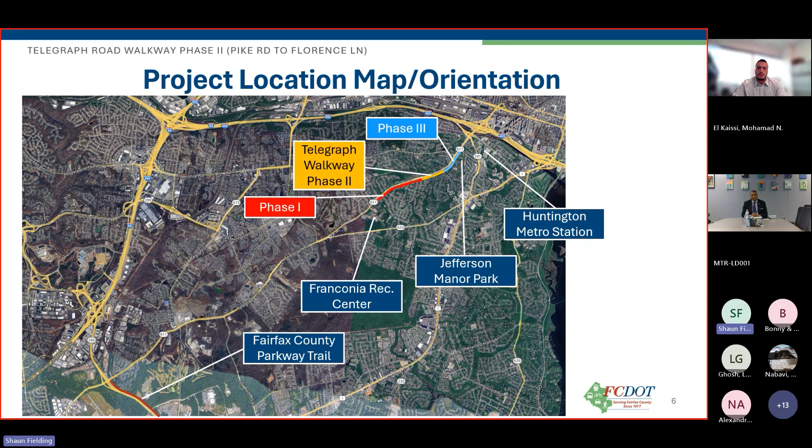Phases 1 and 3 of the project are already complete, labeled in red and light blue. We want to point out how important this connection can be to various amenities of this area, including Huntington Metro Station, Jefferson Manor Park, the Franconia Rec Center, and even long-term connections to the Fairfax County Parkway Trail.

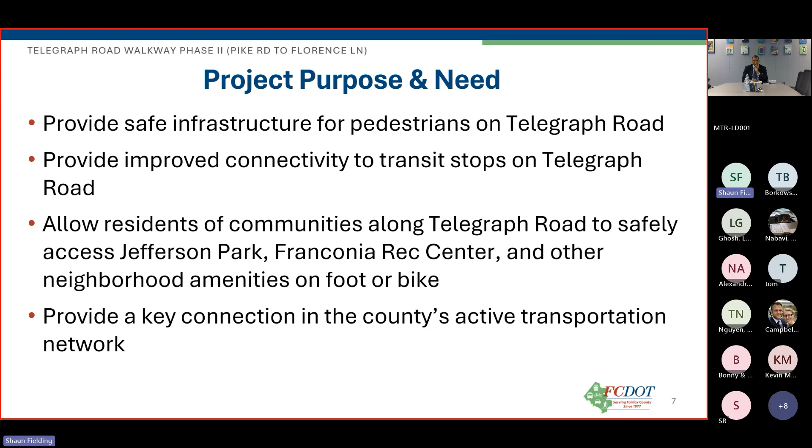The project's purpose is to provide safe infrastructure for pedestrians on Telegraph Road, to improve connectivity to transit stops along Telegraph Road, to allow residents of the communities along Telegraph Road to safely access those amenities mentioned a minute ago, and to provide a key connection to the county's active transportation network.

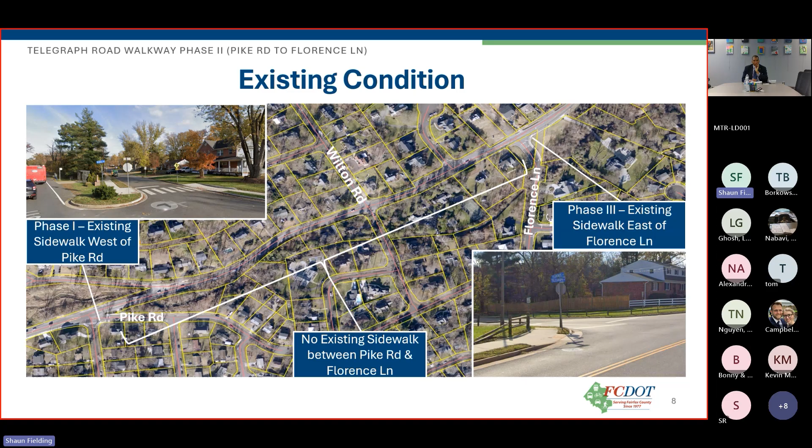Today, there is no sidewalk present between Pike Road and Florence Lane. The Phase 1 project extends from Pike Road to the south or west, and Phase 3 extends from Florence Lane to the north or east. Again, there is no sidewalk present between these two intersections today.

Telegraph Road today is a 2-lane roadway. It's classified as an urban minor arterial. It has an average daily traffic of about 18,000 vehicles each day. It is primarily residential land use surrounding the project footprint.

There are 2 bus stops within this section of sidewalk that we are referencing today. There is today intermittent curb and gutter on both the north and south sides, and intermittent sidewalk primarily on the north, and upstream and downstream of the project on the south.

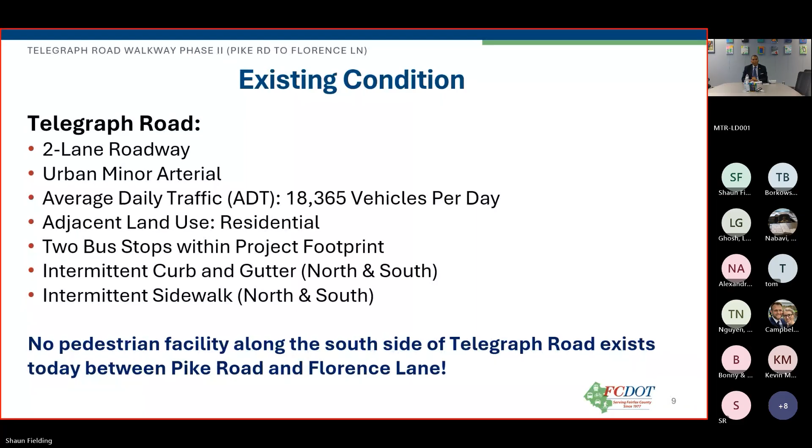I'm going to run through a series of photographs of the roadside, courtesy of Google Street View, which means they are a little dated. They were taken about a year ago by that service. You will see effectively what the existing condition is of the roadway. But please note there is active work going on around Pike Branch, the waterway, where some trees on the side of the road are being removed and some work is actively being prosecuted today. So some of these images are somewhat out of date.

You can see here that we are looking towards the east. We will be looking at images running from the west to the east, towards the Beltway or towards the metro station. North is to the left side of your screen.

You can see on the left side of your screen, or the north side of the roadway - it might be a little hard to see in the upper left-hand quadrant - an existing asphalt pathway that runs along Telegraph Road through this segment. However, note that asphalt walkway is not ADA compliant today. There are several areas of relatively steep slopes, especially at several existing driveways.

You can see the existing condition of the road here on the south end of our project. Subsequent images will slowly move us towards the east, again just to orient us as to the condition of the roadway and the roadside conditions on each side.

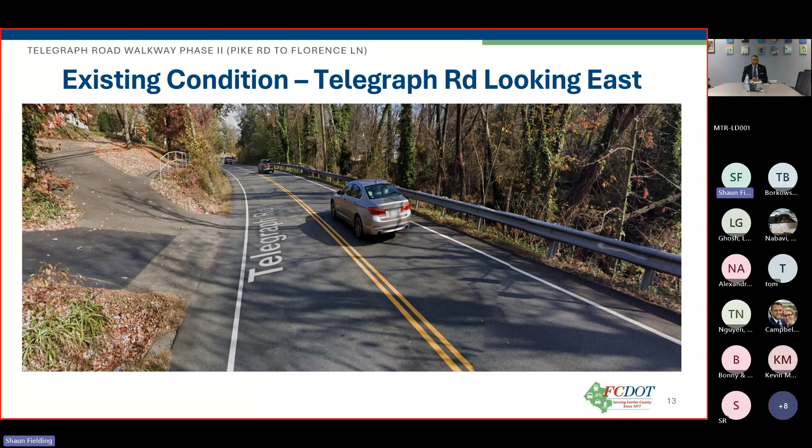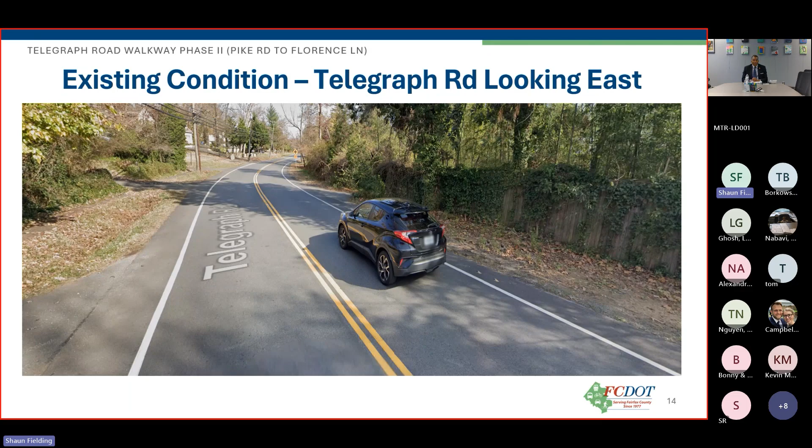That path is still present on the left side, though it is somewhat obscured by the vegetation and the fallen leaves here. But the guardrail is now gone. You can see the private fences on the south side. Similarly here, with fences on the south, no curb and gutter, no guardrail as we move towards the northern end or eastern end of the project.

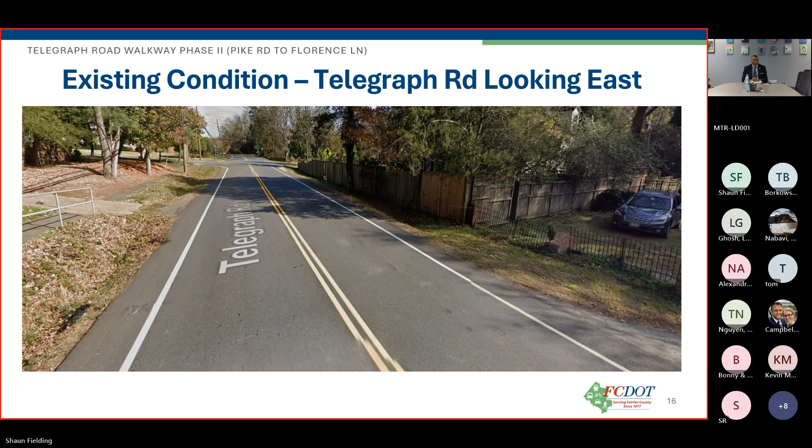Here we're approaching Wilton Road, which is an intermediate intersection roughly midway through our project footprint. We will have new sidewalk and a high visibility crosswalk, and I will cover some of those details in a moment on the proposed condition.

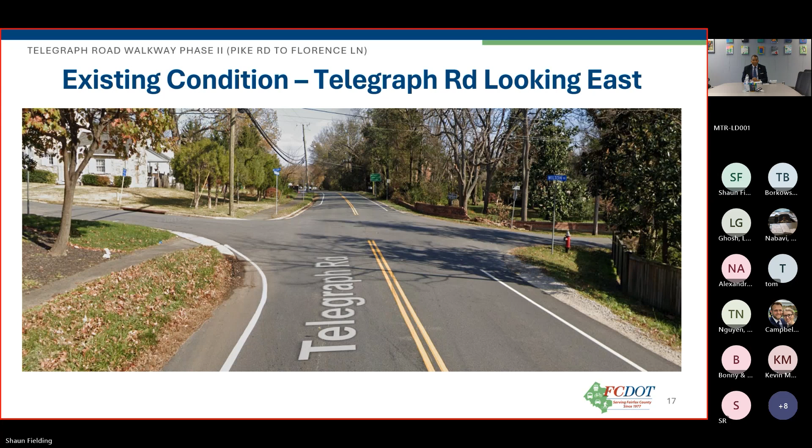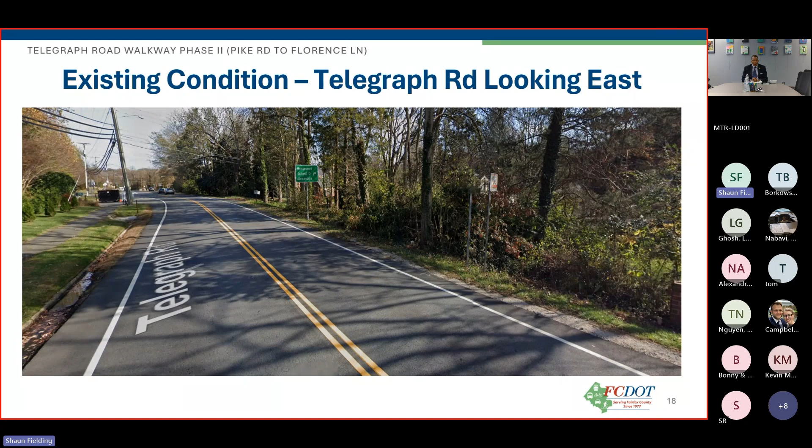Most of our work is happening on the south side, or the right side of your screen, as we are looking east. Towards the eastern end of the project, curb and gutter is present on both sides of the road, and we will be adding sidewalk behind the existing curb and gutter. You can see that asphalt path still present on the left side and some residential properties on the right, and this is effectively the terminus of our project at Florence Lane.

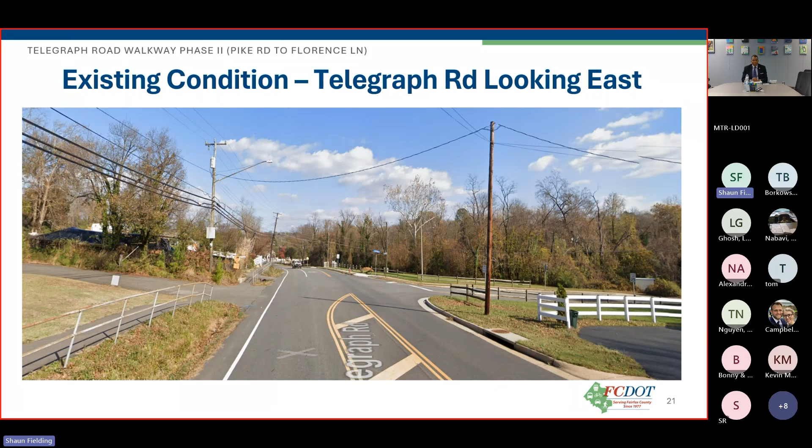That asphalt sidewalk or asphalt path is still present, and this will be the terminus with a new crosswalk crossing Florence Lane.

The project improvements are to provide an additional 1,400 linear feet, measured along the length of the roadway, of 5-foot wide sidewalk with a 4-foot wide grass buffer strip between the roadway and the sidewalk. In addition, there is 495 linear feet of 6-foot wide sidewalk, about half of which will be abutted to the curb, meaning with no grass buffer strip.

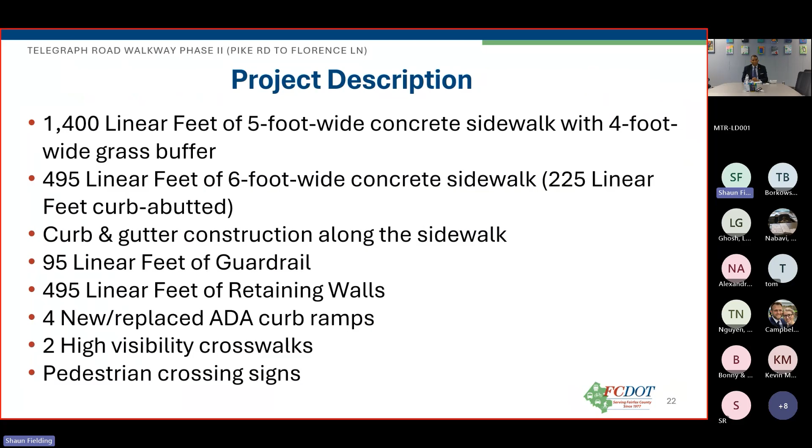This is primarily due to a desire to avoid additional impacts to the waterway adjacent to the south side of the roadway. We will construct curb and gutter along the sidewalk, and provide an additional 100 feet of guardrail where protection is necessary. About 500 feet of retaining wall will be used, again to protect the adjacent waterway. The sidewalk construction will require 4 additional ADA compliant curb ramps at 2 new high visibility crosswalks, along with accompanying pedestrian crossing signs.

Additionally, we will mill and overlay, or repave, the south or eastbound lane of Telegraph Road, adjacent to our work on the south side. We will provide drainage improvements as necessary with the new curb and gutter.

There is an existing double cell culvert, meaning two chambers of structure, that allows Pike Branch to run from the north to the south side of Telegraph Road towards the western end of our project. That culvert will be repaired and a new headwall will be constructed to permit our project. We will remove and reset an existing bus shelter located near Pike Road on the western end of our job, along with other incidental associated improvements such as seeding and restoration of grass, utility relocations, etc.

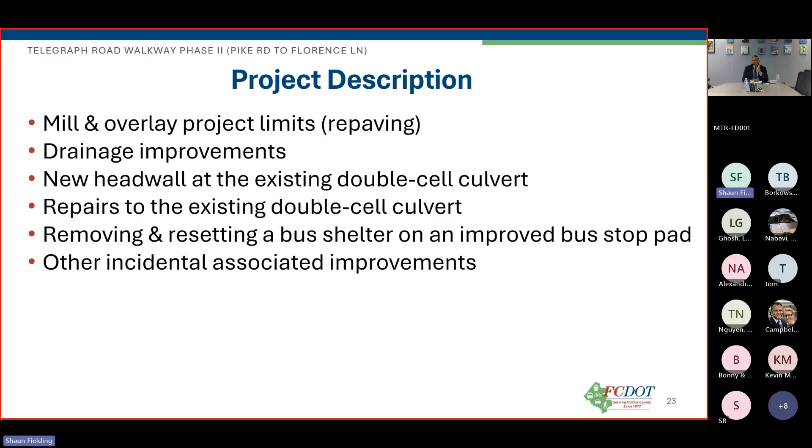I will cover some of these going forward. Again, our proposed condition in visual format between Pike Road and Florence Lane, constructing those improvements as laid out: sidewalk with buffer strip where possible, high visibility crosswalks at each crossing, and about 500 linear feet of retaining wall along Pike Branch to protect that waterway.

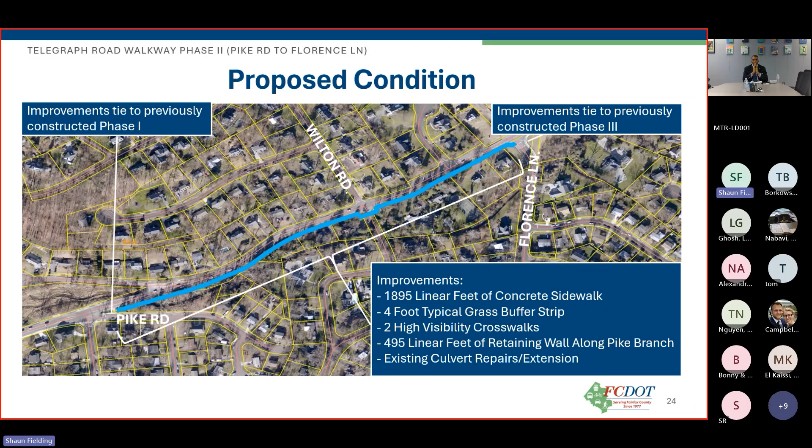We'll be moving into some more detailed views, zoomed in to see more of what our project will entail. Here we are at the western end of the project at Pike Road. The 5-foot concrete sidewalk with buffer strip is present at the very western end of the project, and then there are sections where we abut the sidewalk to the curb and gutter in order to reduce our impact to that waterway, which is Pike Branch.

The retaining wall here is also there to protect the waterway and avoid environmental impacts. Here, the culvert extension can be seen, as labeled, with the leader pointing to the location of that passageway for Pike Branch to run underneath Telegraph Road.

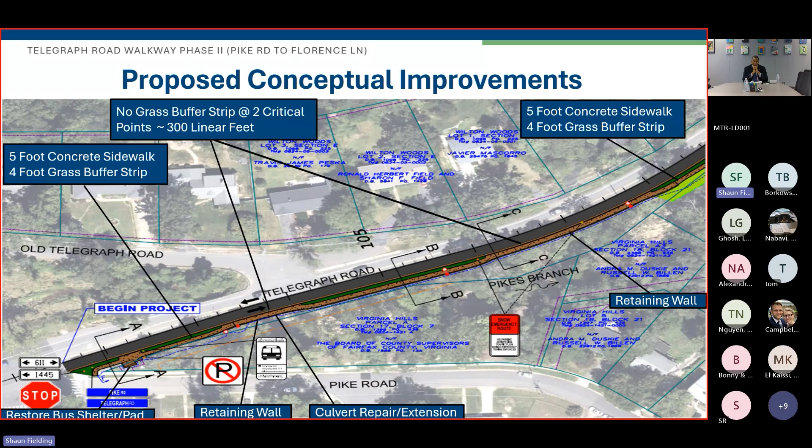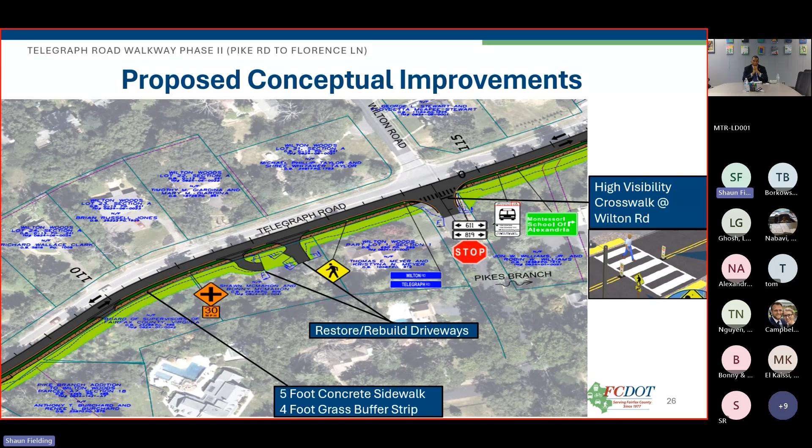As we move towards the east, our work will provide continuous sidewalk with buffer strip from that point on. We will rebuild and restore any impacted driveways to the adjacent residential properties, and provide a new high visibility crosswalk across Wilton Road. You can see in the image on the right what a high visibility crosswalk is - that pattern of transverse stripes across the road.

This is the terminus of our project at Florence Lane. Again, continuous sidewalk and buffer strip will be provided, rebuilding and restoring impacted driveways to the residential properties, and a new high visibility crosswalk across Florence Lane.

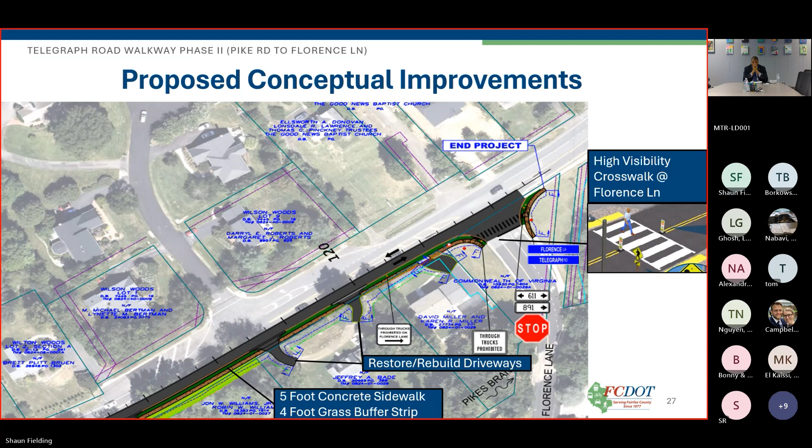Grading will be as tight as possible, and in areas where the grading goes beyond the existing right-of-way, we will propose temporary grading and construction easements, highlighted here as that green dashed line and labeled as such. Those temporary construction easements will expire at the termination of the construction project, so they are temporary impacts. Any disturbed area within that will be restored with topsoil and grass seed.

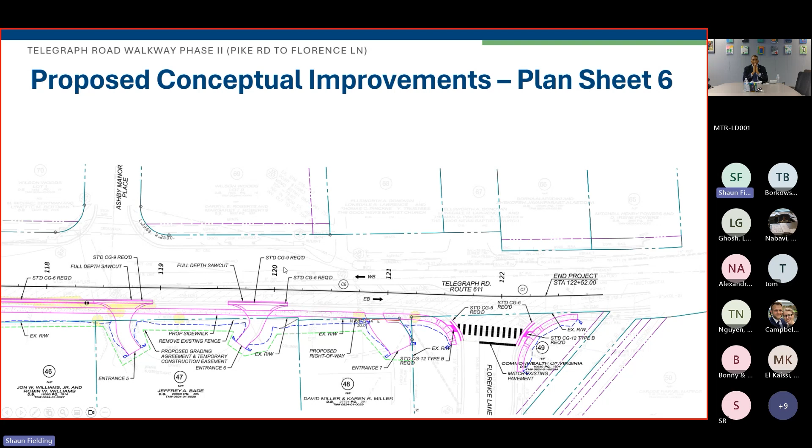This is kind of a zoomed in view of that parcel 48 so that we can see the one right-of-way impact that we have. It's that blue shaded area. It equates to right around 46 square feet. It is a relatively narrow strip and creates a property line that is parallel to the roadway center line.

There are 6 total residential parcels that are impacted. Only this one with right-of-way. The other 5 parcels, as I've mentioned, will have temporary construction easements with a grading agreement.

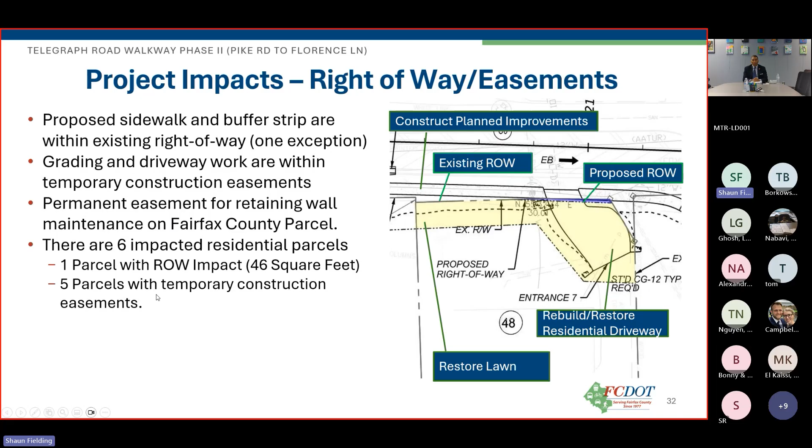This is each parcel laid out. Again, just to highlight that we have a relatively minimal impact as far as right-of-way goes, just that 46 square feet for parcel 48. Easements: the only permanent easement we are proposing is applying to the Fairfax County Board of Supervisors property towards the western end of our project. All other easements are temporary for construction.

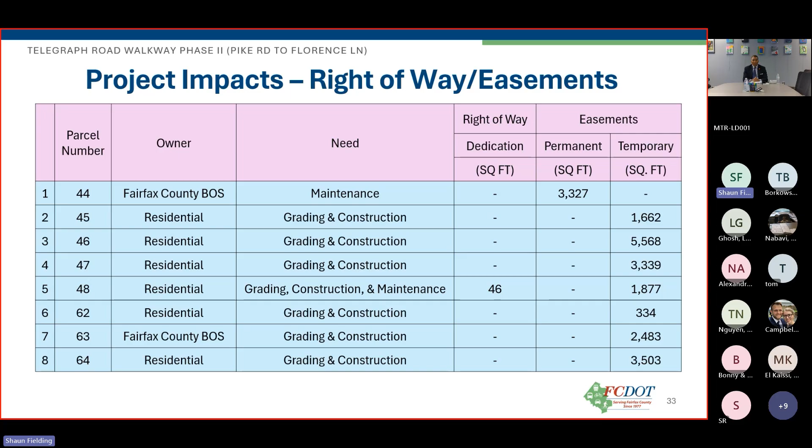Our proposed condition in cross-section view will look something like the image on your screen. We are building curb and gutter, a utility strip or grass buffer strip—those are equivalent terms—with a 5-foot sidewalk throughout the majority of the project. Where there is a need for a retaining wall, we will have a 6-foot sidewalk with the retaining wall to allow for better bike usage, to have a little bit of extra space for bicycles.

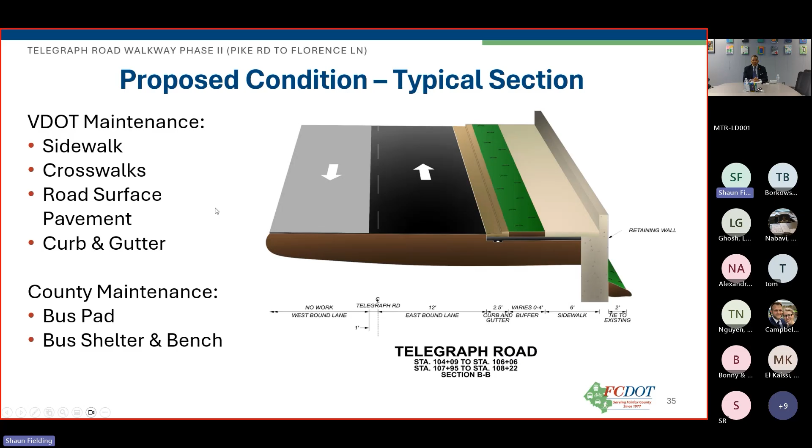And the buffer strip in these areas will vary between 4 feet and 0 feet, where the sidewalk abuts the curb and gutter in some areas. Where it abuts, it will look something like that, where the width of the sidewalk begins to vary, but it will attach directly to the curb and gutter.

All of the roadway improvements will be eventually maintained by VDOT. The only county maintenance items will be the bus pad itself, and the bus shelter and bench associated with that bus pad. All the other elements will be transferred to VDOT for state maintenance.

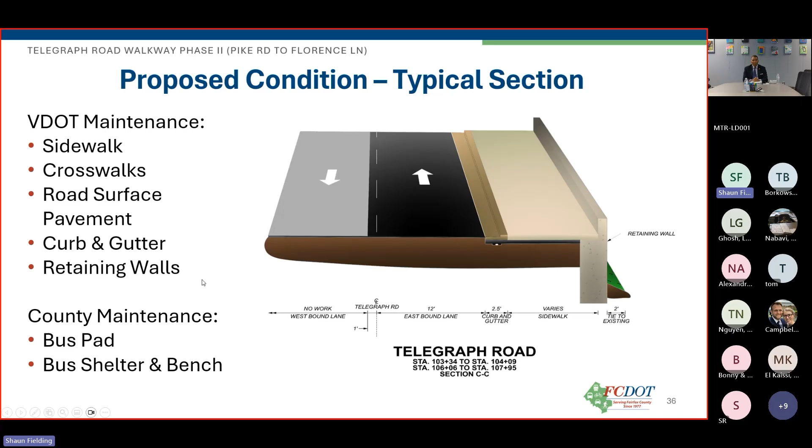The bus stop, as it is today, is shown on your screen. This will be improved as curb and gutter will be run along it, and it'll need to be raised to meet that grade. So we will replace it with an upgraded 25 by 9-foot concrete pad. The bus shelter will be relocated to that new pad, and the bench will be relocated if necessary as well.

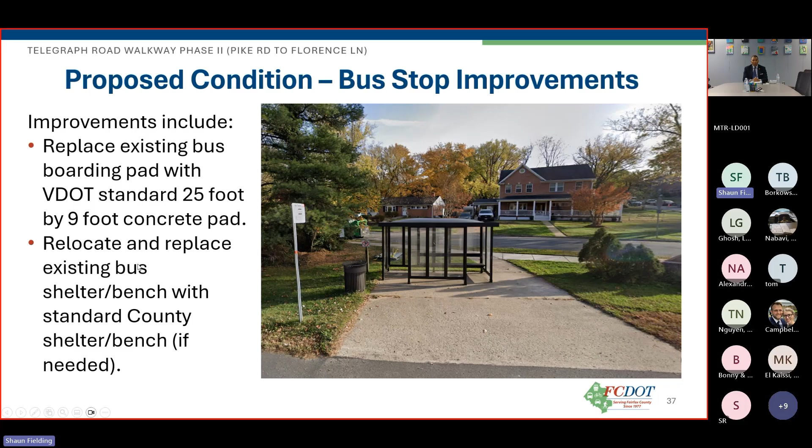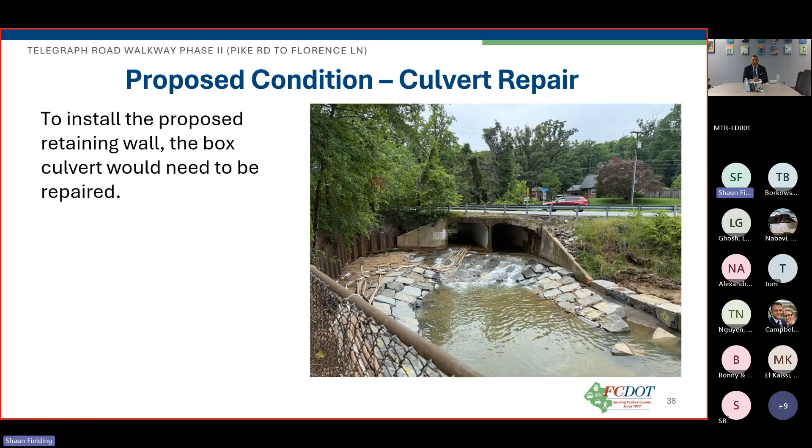This is a picture of the existing double cell culvert as it is today. This culvert's head wall, the concrete walls that stretch from either side of those open cells, will need to be removed and replaced with a minor extension to the culvert itself. The culvert will be repaired for any damage to provide for a long lifespan.

The project does anticipate several utility impacts, including 1 light pole, 3 overhead utility poles, around 200 linear feet of water main with their associated 4 water meters, 4 water valves, and 1 fire hydrant. About 150 linear feet of Washington Gas line will be potentially relocated, and 800 linear feet of Verizon fiber optic line.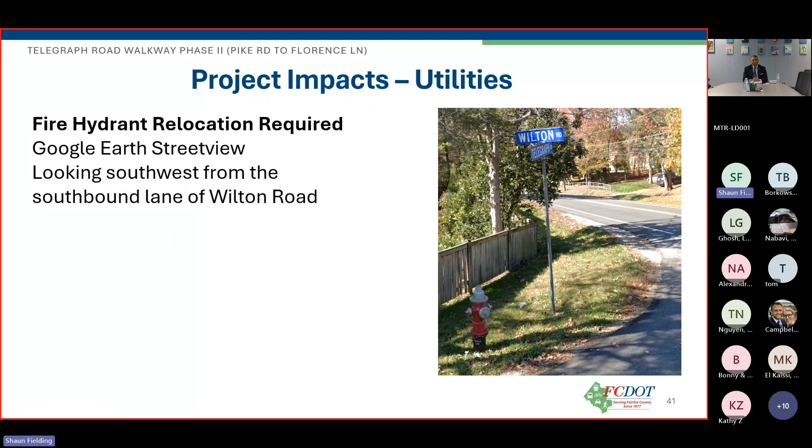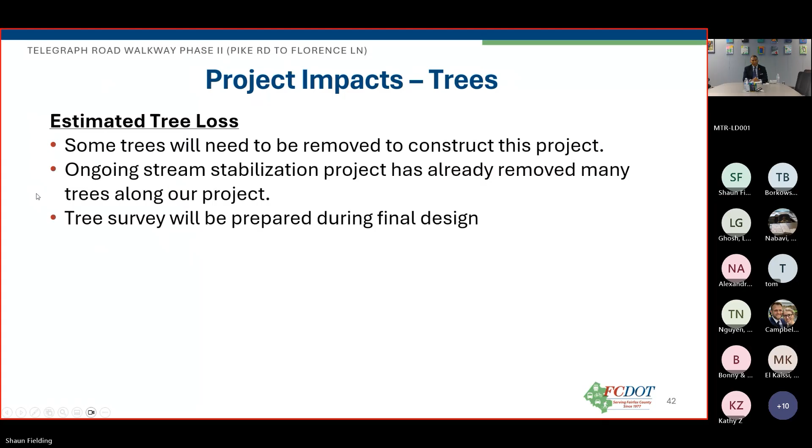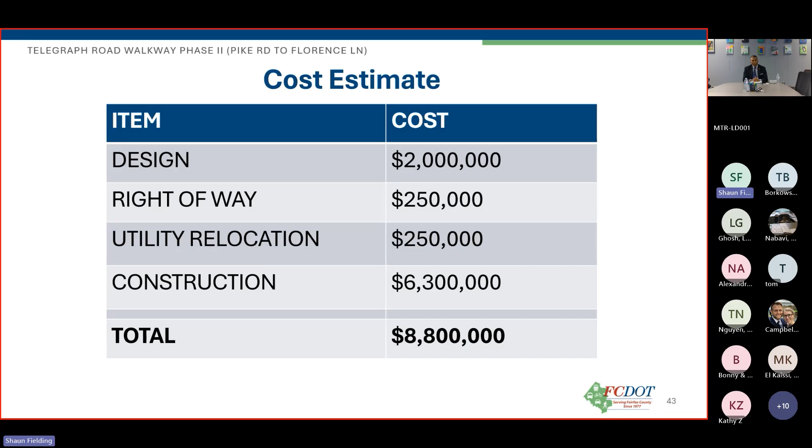The cost estimate for this project is on the screen. The design estimate is around $2 million. The right-of-way estimate is around $250,000. The utility relocation is expected at about the same, $250,000, and the construction is estimated at around $6.3 million, with a total cost of $8.8 million.

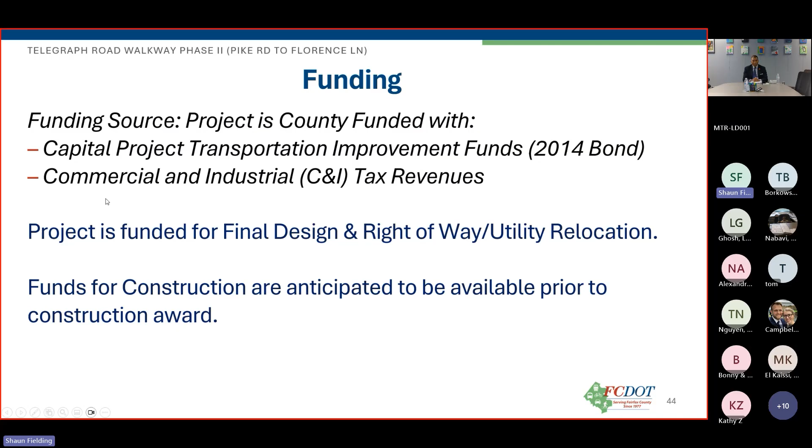This project is county funded between the capital project transportation improvement funds from the 2014 bond and commercial and industrial C&I tax revenues. It is funded today through final design and right-of-way/utility relocation, and funds for construction are anticipated to be available prior to construction award.

At this point, I'll turn it back to Mo to discuss next steps and to address comments and questions today.

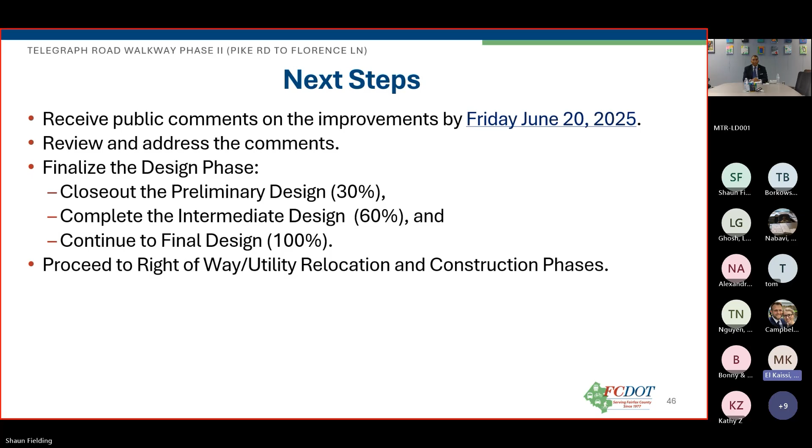Thank you, Shaun. So the next steps will be receiving public comments on the improvements by Friday, June 20, reviewing and addressing the comments, finalizing the design, which would include closing out the preliminary design, the current 30%, completing the intermediate design, which is 60% design, continuing to final design, which is 100% design, and proceeding with right-of-way and utility relocation and construction phases.